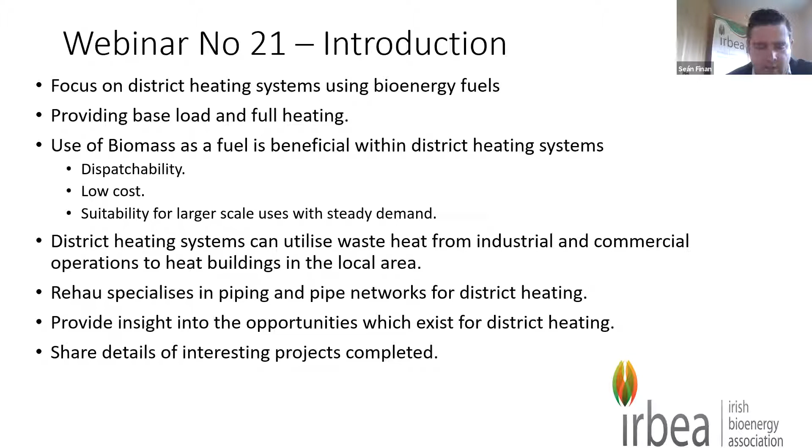REHAU specialises in piping and pipe networks for district heating and will provide an insight into the opportunities which exist for district heating. Details of some interesting projects which the organisation has been involved in will also be outlined.

Our speakers this morning, and we're delighted to be joined by Rory and Alexandra. Rory is the REHAU area sales manager based in Ireland, and Alexandra is the REHAU technical team lead for district heating based in the UK.

So I will now stop sharing my screen, and I would invite, I think it's Rory first, to share your presentation. We'll look forward to hearing your presentation, Rory. Thank you. Okay, good morning. Sound okay, Sean? Perfect, yeah. Okay, lovely, thank you very much.

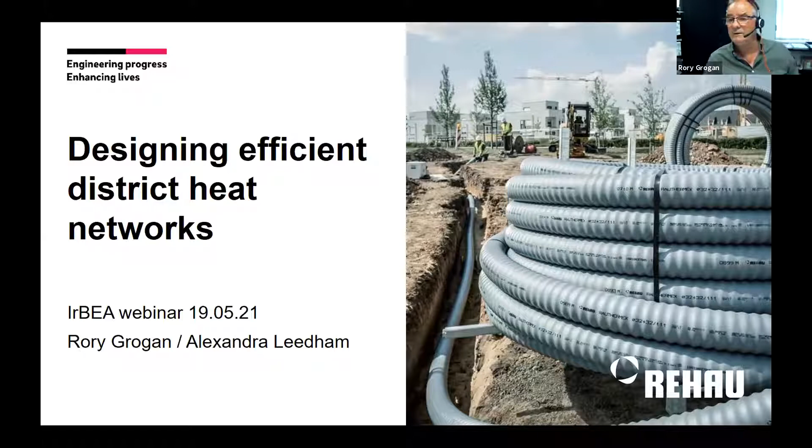Thanks, Sean, and thanks to IrBEA for letting us present this morning. My name is Rory Grogan, I'm an area sales manager for REHAU. REHAU itself is a German company founded back in 1948 in a town of the same name. Currently, we operate as an international company in about 50 countries, 170 locations, covering manufacturing, distribution and sales.

We operate in various markets, be it the automotive industry, the window industry, industrial division. We have a dedicated business solutions division, of which I'm part. My responsibilities would be for the sales of, among other things, district heating pipework, underfloor heating, plumbing and heating, acoustic, soil and waste, to name but a few.

Regarding our district heating product, we consider ourselves probably one of the market leaders in the UK market. We're also the largest stockist of district heating pipework in the UK, so we're very close to our customer base and we can react with quicker response times. We also manufacture some of the pipework in our own facility in North Wales, again to be near to the market and to reduce our CO2 impact on the market.

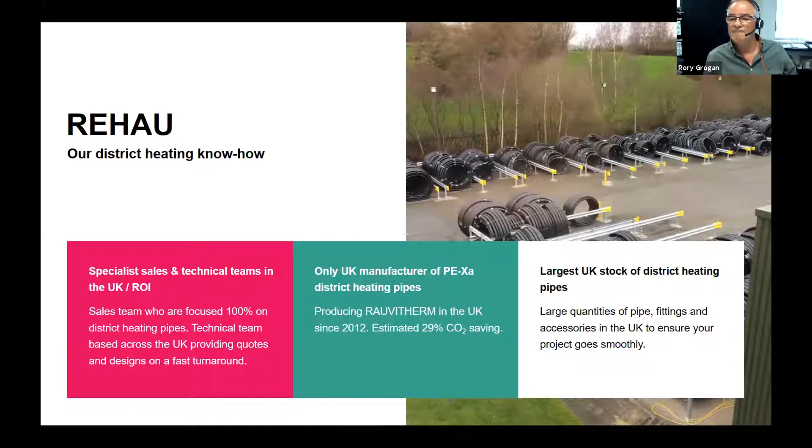So what we're going to do now is look at the agenda for today: basic principles of district heating, some standards, the different types of material that are available, some topics about installation and design, and then finally some case studies with questions and answers.

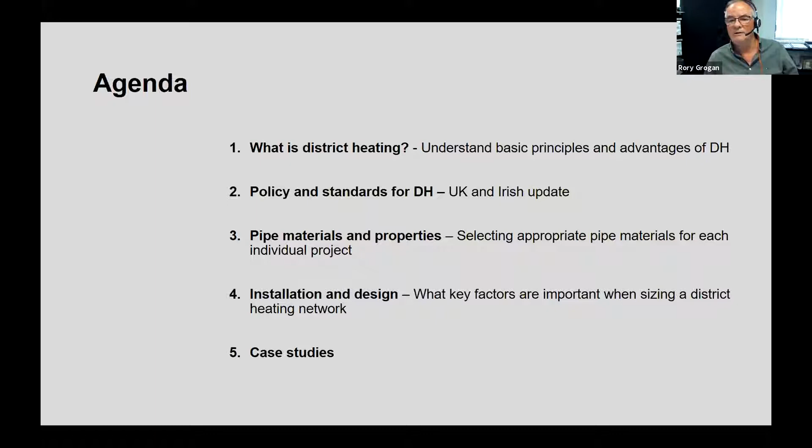So if you're in this seminar, you probably have either heard of district heating or are experienced in it, or wanting to learn a bit more. So just an overview of what district heating is if you are new to it.

The basic principle is that there is a heat source, which is a central source for an area. You don't have boilers in the individual buildings. This heat is distributed around via a network of pipework, delivering heat to either domestic or non-domestic buildings, such as schools, hospitals, etc., or multi-occupancy buildings, where the heat is then distributed to different floors and flats accordingly.

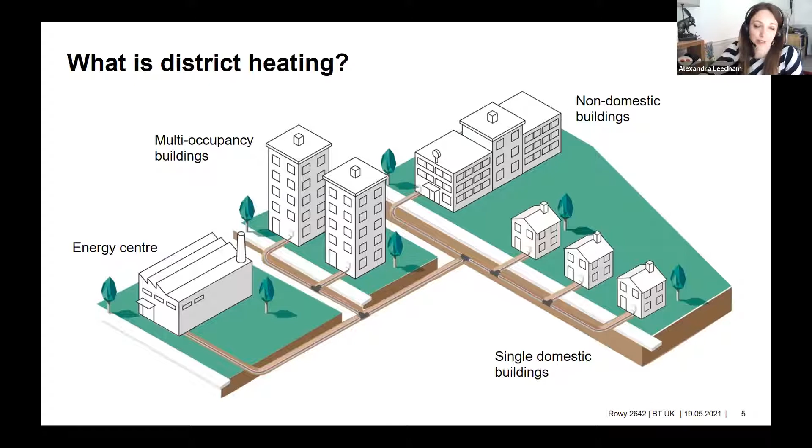Inside of the building, the pipework is connected to a heat interface unit, then the heating is distributed with internal pipework through underfloor heating or radiator systems, so any conventional heating systems.

Energy efficiency is the biggest driver of district heating, and it's more efficient to produce energy on a local level. The driver for district heating in the UK and in Ireland is the combination of renewable energy sources such as biomass and heat pumps.

There is always a benefit of not just going renewables, but also that there is economies of scale. So all these technologies are feasible on a scale where a few buildings are connected. In general, district heating or a heat network would be systems that connect more than 2 or 3 buildings altogether.

This technology is future-proof, so the heat source can be changed at a later stage. So if you would like to combine heat sources as well, this is possible. Having a backup boiler of some sort, or changing the technology completely over the next years, that is also possible.

There is no maintenance for every single building as you would have with boilers, and this is one of the biggest benefits too. So there is a central plant maintained and looked after by the operator.

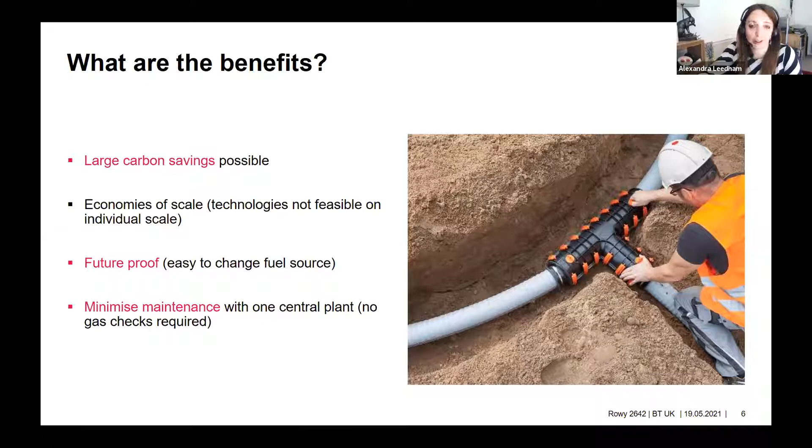The heat sources range from gas CHPs, which are going to probably reduce in the next years, heat pumps that have been talked about quite a lot recently, biomass and anaerobic digestion, something that we'll be talking about today, which is really good for rural areas where there is no supply of other heat means.

Solar thermal is also a technology which can be combined with others, for example even with anaerobic digestion plants, biomass, CHPs, etc. There can be deep geothermal heat sources for heat pumps, or waste heat, and waste heat can cover a range of different scenarios. It can be production factory waste heat, data centers, or even sometimes sewage heat or infrastructure waste heat—a lot of different options.

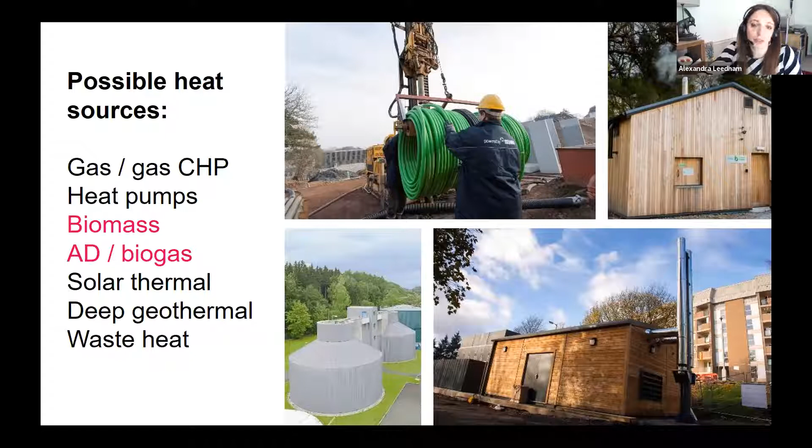The question is, why don't we install more district heating, and why it hasn't been as popular in the last 20 or 30 years? There is a mixed history.

In the 1960s and 1970s, district heating was encouraged and installed quite a lot, but it inherited a bad reputation because it wasn't a very efficient system, with lots of steam networks which did fail and were really designed to sell more coal, not for their efficiency or for good design and energy savings.

Later on, these kinds of systems were replaced by boilers, and now we're coming back to district heating because, with economies of scale, it is a very efficient way of heating our cities, towns, and villages. Unfortunately, district heating has a higher capital investment cost, but that comes with savings in the long run.

Education is one of the biggest things on our mind at the moment, because low awareness among consumers creates a block between installing a connection to a district heating system versus a boiler, where you have control over what you're doing and where you want the heating placed. The next webinar of the association, I've noticed, is on community involvement, and this is probably a very good link to this awareness about the benefits of district heating systems and how customers can benefit from it in the long run. It's one of the most important points here.

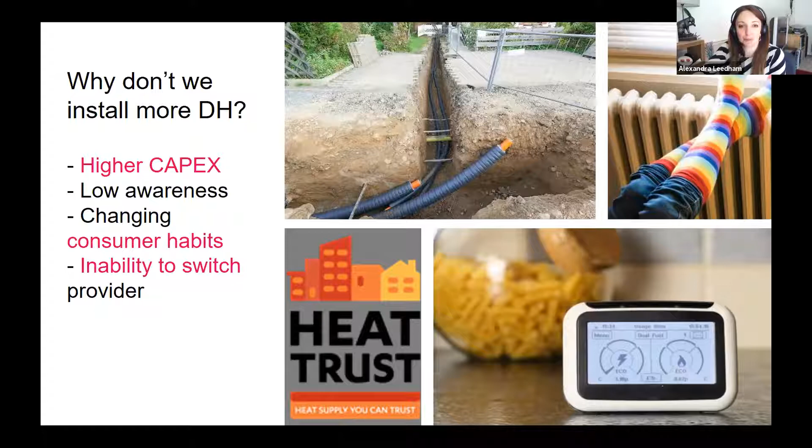Around policy and standards, from a UK perspective, there is experience of having a biomass boom, shall I say, installed in various projects with smaller and larger systems supported by RHI. Now we are observing that gas boilers are being banned for new homes from 2025, so a lot of developers are already looking at district heating systems as a new technology to install in a couple of years. Generally, district heat only covers 2% of all heat demand, and this is planned to rise to 17%, with government support.

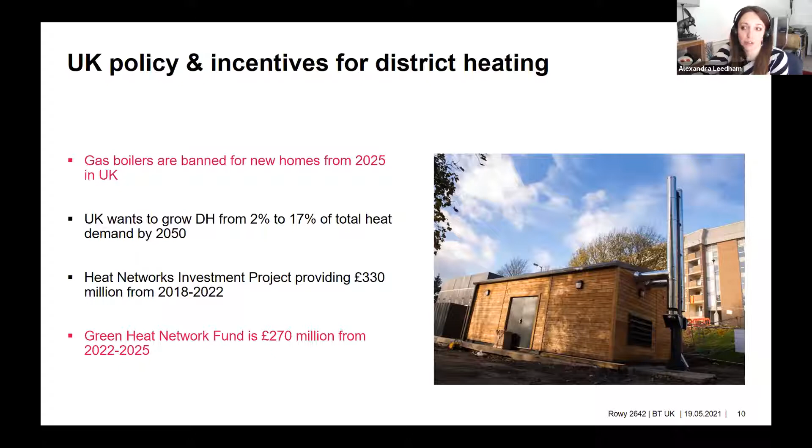So incentives are the second point after education, which is extremely important to promote these systems. This is something the Heat Networks Investment Project has been working on, and a new scheme is being launched, the Green Heat Network Fund, from 2022 onwards. Incentives are really helping this industry evolve and progress, and hopefully there will be new schemes launched in Ireland and Northern Ireland too.

The association probably knows a lot more about renewable heat policy in Ireland, so I would encourage you to get in touch with my colleagues here. But from what you've probably heard and seen before, Irish policy is to supply 40% of renewable heat by 2030, which is a good ambition. This means district heating targets of 10% by 2030 should increase by 1% yearly. Again, this is a good ambition, and I think it's achievable. If you look at the rural percentage of heat demand, this is where biomass, anaerobic digestion, and waste heat can probably be incorporated, and that's a huge opportunity for Ireland.

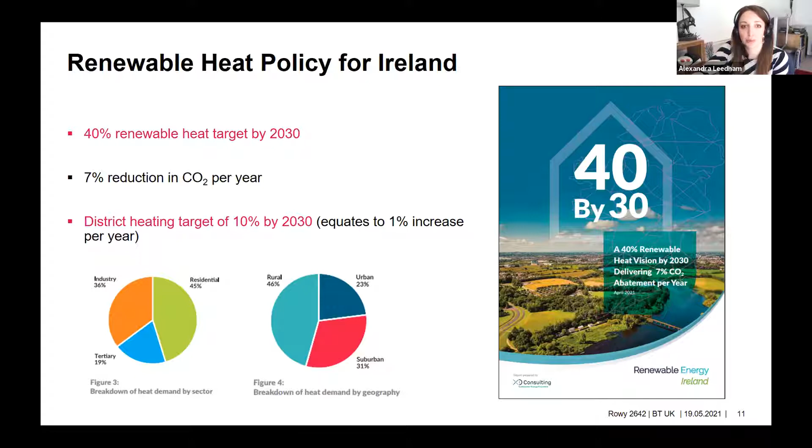If you are new to district heating, or would like to deepen your knowledge in a specific area, I would strongly recommend looking through the CIBSE Code of Practice for Heat Networks. This guide covers literally everything from the very start, feasibility study, assessing your project, putting your team together, all the way to commissioning, customer support, post-commissioning and operation of a network. It covers different points on designing the system, what material options you have, where there's a minimum requirement, and where best practice is recommended. So you have a choice of levels of how you comply with this guide. In the UK, this guide is obligatory for all incentivized systems. If you receive funding from the government, the system has to be covered by the minimum requirements of the code. So it's a really good guide, and I'd recommend looking through it.

As you know, Rehau are a manufacturer of polymer systems, but I'll give you an overview of the pipe material options available. We're mainly looking at steel and polymer. When you look at the full range of pipework, they're divided into those insulated with polyurethane foam, which is rigid foam - these are the three pipes on your left - and the other type, layered foam around the pipework, which are non-bonded systems where the insulation isn't bonded to the actual carrier pipe. Each of these pipes has strengths and weaknesses, but we'll go through them now.

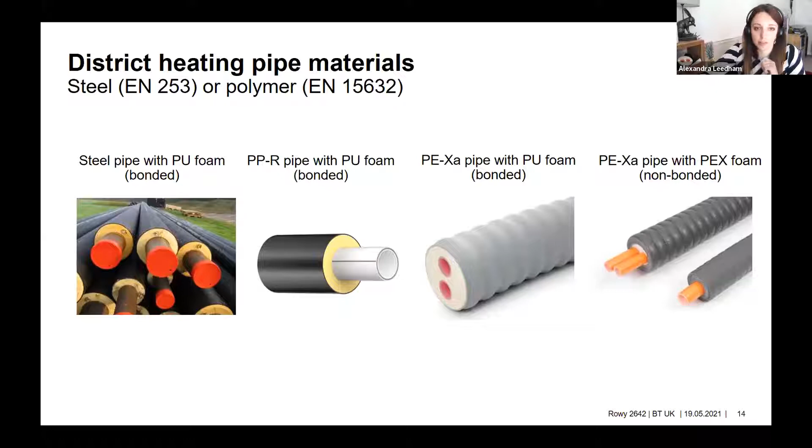When we look at steel pipes, they're very strong in their temperature and pressure limits. This is why they've been so popular for steam networks with really high temperatures, like 90, 100 and plus degrees, and also for citywide networks where large diameters are important. These networks stretch for kilometers across cities, sometimes as ring networks. That's where steel is at its strongest, because pressure limits are quite high and large diameters are a very good combination for these kinds of systems. It's a very strong material, resistant to impact damage as well. On the weaknesses side, this material is quite heavy and not flexible - it always comes in straight lengths with a welding requirement after each 6 or 12 meter length.

There are some coiled solutions, but only for the smallest pipework at the moment, and they're not the classic steel configuration - they're more like a corrugated type.

When joints are required every 6-12 meters and for every directional change, it adds up the installation cost due to the fact that you're welding every single connection. At the same time, the picture on the right shows an expansion loop. So every system designed in steel will have to have expansion loops at every directional change or when the stretches of pipe are quite long, to accommodate the expansion forces on the system.

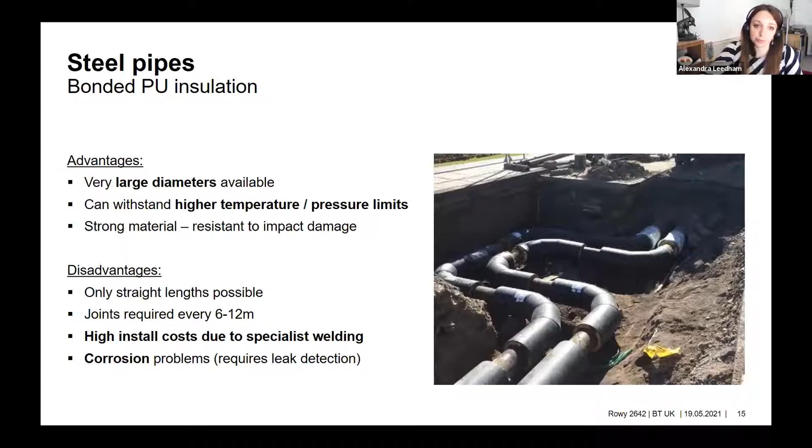PPR pipes are also large pipes, but in polymer. PPR stands for random polypropylene. This has the same insulation as steel, polyurethane, and in general it's available up to 315 mil in diameter, so in steel equivalent, DN 250. But these kinds of pipes can be manufactured in slightly larger diameters too, as a custom option. If you would like a combination of, for example, PPR pipework and another type of polymer like PEX, you can have a hybrid system between these two to create a fully polymer system on a larger level.

At a temperature difference of 30 degrees, so for example 70-40, you would achieve 16 megawatts covering in a 315 mil pipe, so quite a large amount. There are no expansion loops required due to the way the material expands and contracts, so as opposed to steel, this pipe can go in a straight line without any need for loops.

These materials, all polymer materials, are highly corrosion resistant. Simply, there is no steel, no other corrosive metals in the pipe, and because of that there is no requirement for leak detection. So you will see that most of the polymer pipes don't actually have any.

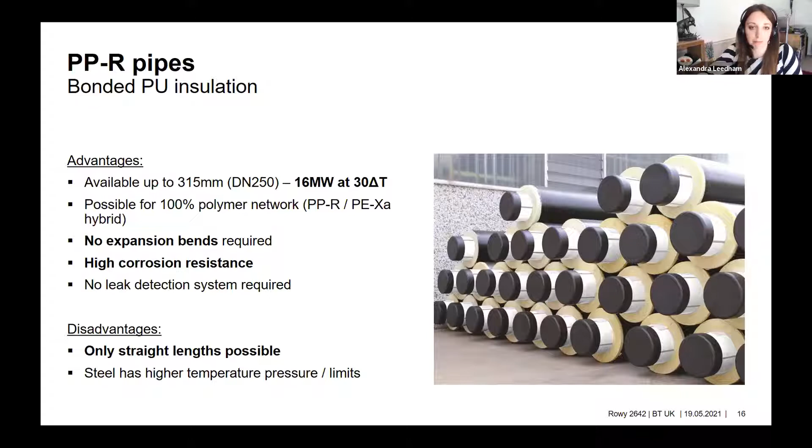We do two different types of PEX pipes. The PEX pipes themselves are the same, but one is with bonded PU insulation and the other is with layered PEX insulation. The advantages of both is very long coil lengths, so you don't have to have any connections in between, compared to 12-meter lengths or 6-meter lengths.

So for long soft dig projects, especially where you're only required to open a short part of a road, for example in a city center, coiled pipework is really time and energy saving. It has really good flexibility and no expansion loops are required. Again, for polymers, these expansion forces are self-compensating as long as you're burying the pipework in the correct manner.

The compression sleeve joints shown in the picture are used for connecting these pipes, and there are no hot works involved, and no leak detection required, same as in PPR.

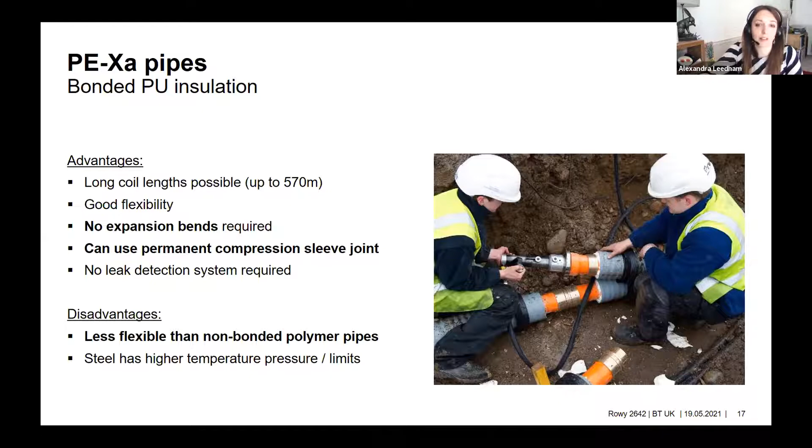When comparing these kinds of pipes with the ones insulated with layered insulation, of course they're not as flexible because it's a rigid PU insulation. And as I mentioned before, steel has higher temperature and pressure limits, which applies to the non-bonded PEX insulated pipe as well.

Here, disadvantages are also that this kind of insulation is of lower performance. So if your project requires as low heat losses as possible and it's a critical situation, then PU insulation would be the preference.

The advantages of these systems is not only long coil lengths, but it's very flexible and it's ideal for house installations. So if you would like to naturally bend the pipe into the house, and the foam is really easy to take off.

The same as on the PU insulated product, this uses a compression sleeve joint, which can be put under pressure and under temperature immediately after it has been installed.

We have some samples to show you later, so hopefully Rory and I can demonstrate how they look like in real life.

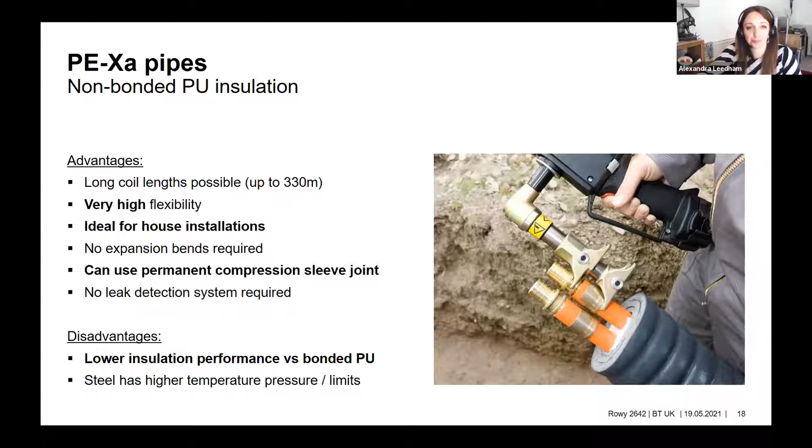The problem with steel, as I mentioned, is not the pipe itself, it's the actual connection joints and the welding of them. According to the German CHP and District Heating and Cooling Association, more than 75% of failures are actually due to on-site welding. That's where, if water is coming out of the system, it will affect the pipe next to the joint as well.

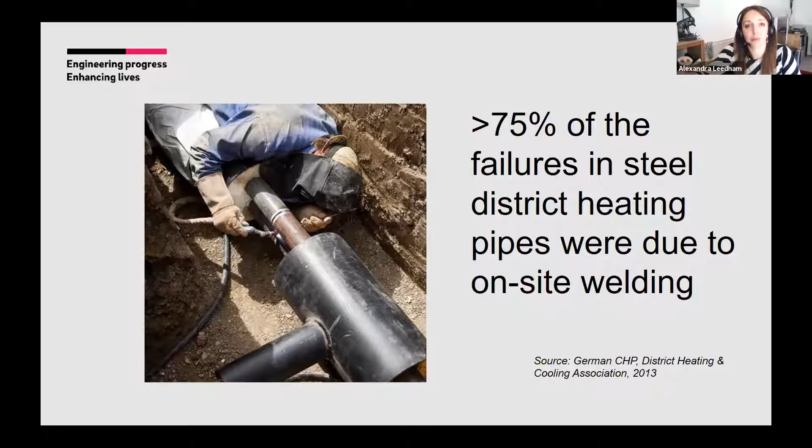A picture sometimes is better than 1,000 words. You can see on the left, the steel system has been installed with an expansion loop and a directional change. Again, these small directional changes for steel always require extra welding and extra pieces of pipe under an angle.

Here we are closing the road off and keeping the pipework occupying the whole area. If a polymer system was used in this case, you would create a T as shown on the right, without sometimes even closing the road, because you only need a small trench to bury the pipe in.

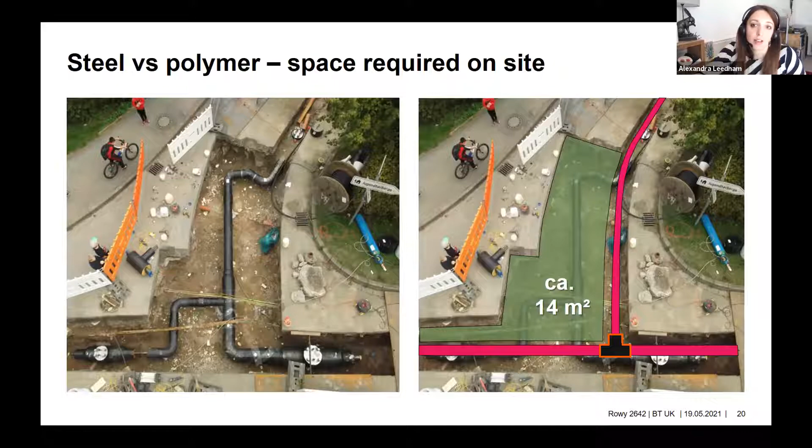When we talk about heat network design, we're always talking about very different generations of pipework distribution systems, with different temperatures. Looking back at coal plant and steam distribution, that's well over 100 degrees. Slowly we've changed to the third generation, which covers biomass and gas CHP, higher temperature waste heat systems, normally around 80 flow, 60 return.

Now we're also moving further to heat pumps and other types of waste heat industries, moving towards 60 degrees flow. These are all different generations of temperatures, while the fifth generation is probably arguably not even a generation, but a very different kind of beast.

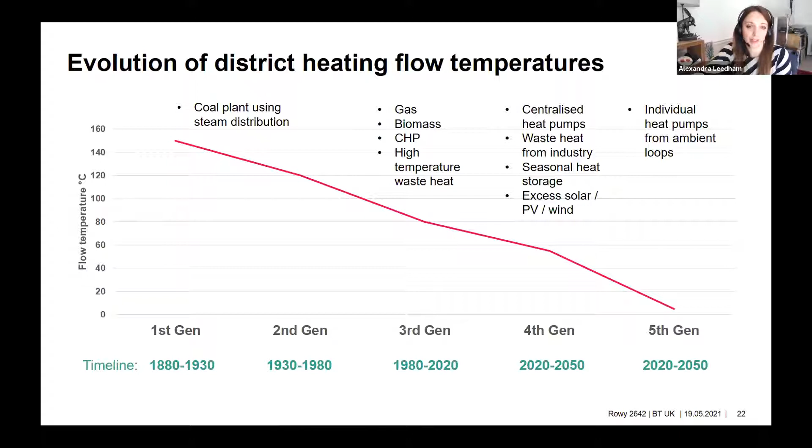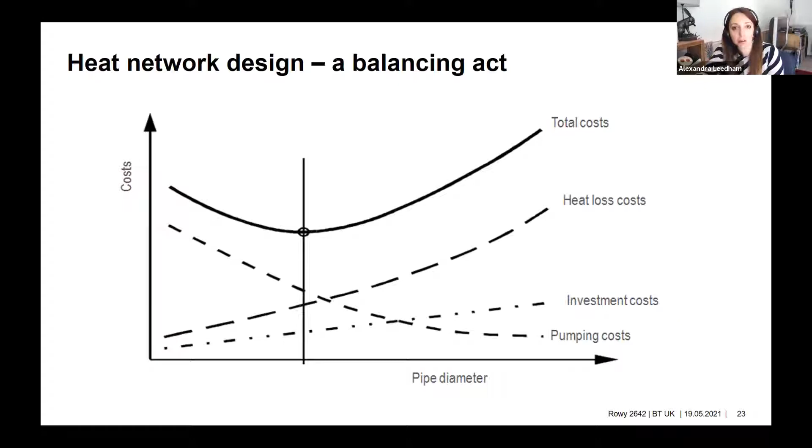Fifth generation is ambient loops, where water is distributed at cooler temperatures and then enhanced by heat pumps at the property connections. But whichever system you choose, there's always a balancing act of combining trying to make the pipe size as small as possible, so the whole network is as lean as possible, while saving on pumping costs and balancing the heat loss of the pipework itself.

There are different methods to reduce installation costs from the very start - capex - such as using soft dig areas so you don't have to go on the roads and reinstate tarmacs. It's also using twin pipes because they occupy less space in the trench, so your civils will be less, but twin pipes are also more efficient in heat loss.

Hot tapping is something where you can avoid using dead legs for future connections, and you can actually tap into a live network at a later stage when a house needs to be connected. And using secondary spines saves cost compared to creating large T's on the main spine.

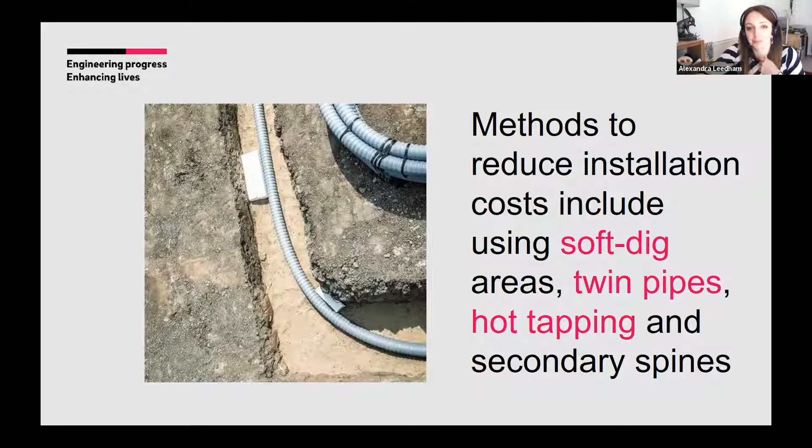I've mentioned the efficiency of twin pipes - here you can see an example of two single pipes in size 25, 40, or 63 compared to the equivalent heat loss in twin pipework. In each case, the saving on heat loss is around 30%.

Which is huge for an operator, not only for the operator, but for the whole system's efficiency. So twin pipes will not only save the civils cost at the very start, part of the capex, but also save costs in the long run as an operational cost.

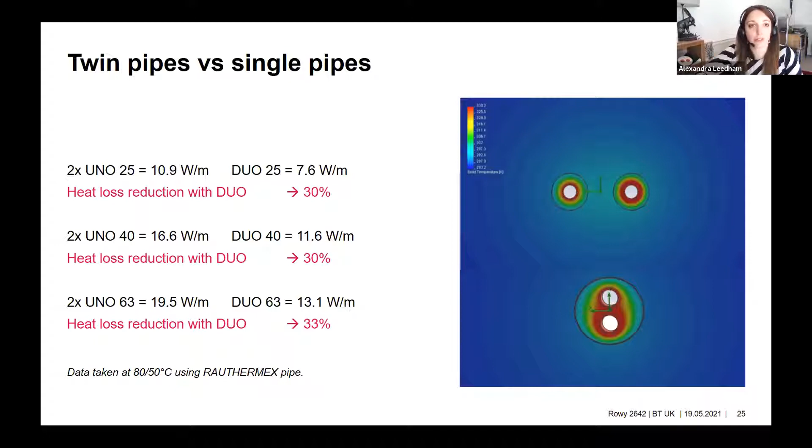Hot tapping, as I mentioned, is literally creating a T, creating a connection to a house that has not been part of the system from the very start, at a later stage. It's a very fast way to create a fitting, and not much soil has to be opened up to create this fitting.

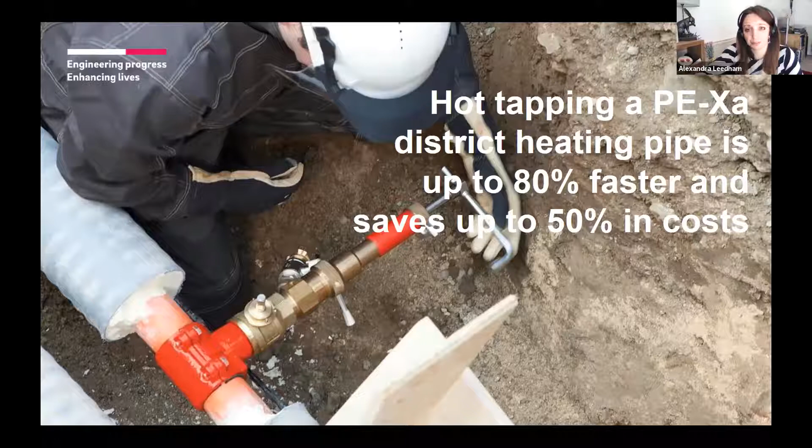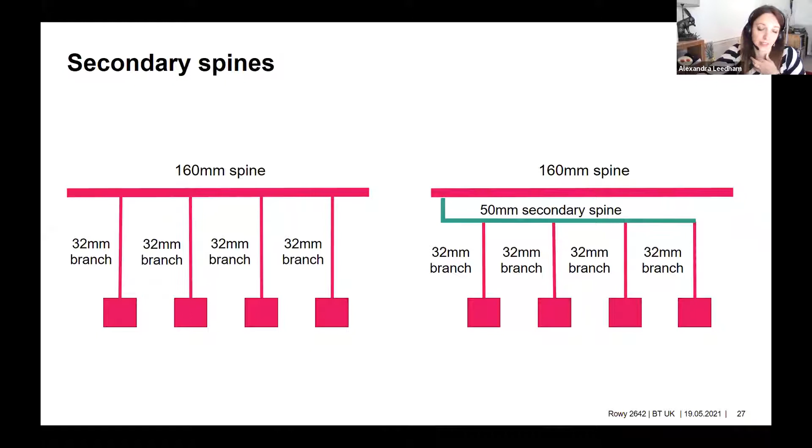Secondary spines are a more efficient way of dealing with connections off a large spine and can save cost in the long run. One of the most important things to look into is the actual requirement for the heat - how much heat is really required, or what is the peak compared to the real use of the system.

It was designed with a diversity of 85%, so 85% of every property would switch on their heating at the same time. But the actual peak load on the coldest day in February was actually only 63% peak. So it's very important to assess how much heat is actually required by all properties at the same time.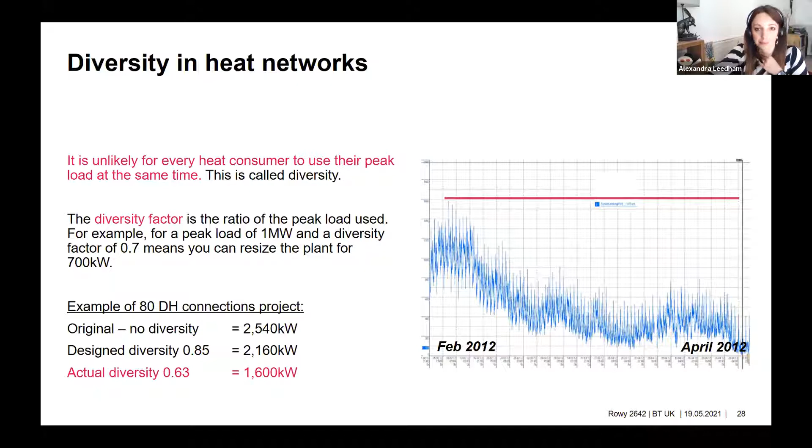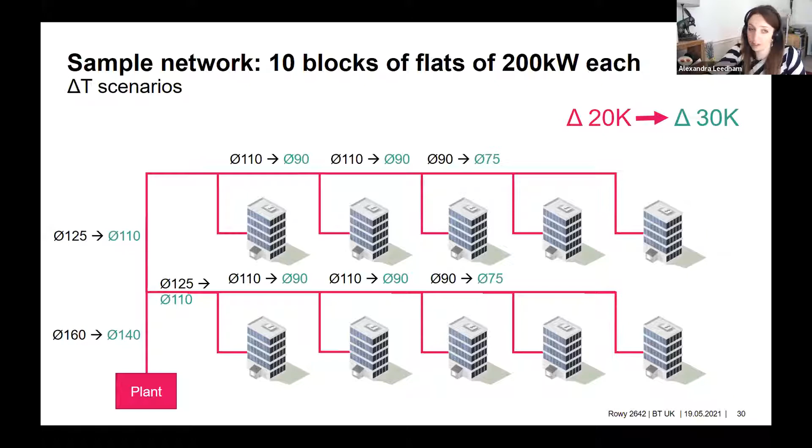Just to show you a small example of how different temperature differences affect the design of the system. If you are designing with a 20-degree delta T, so for example 80-60 compared to 80-50 with a 30-degree delta T, you are saving on the pipe diameter. So the wider the delta T between flow and return, the smaller the pipe work you will get. By increasing the temperature difference, you're not only saving your heat losses, but also reducing the pipe size in the long run and the operational cost.

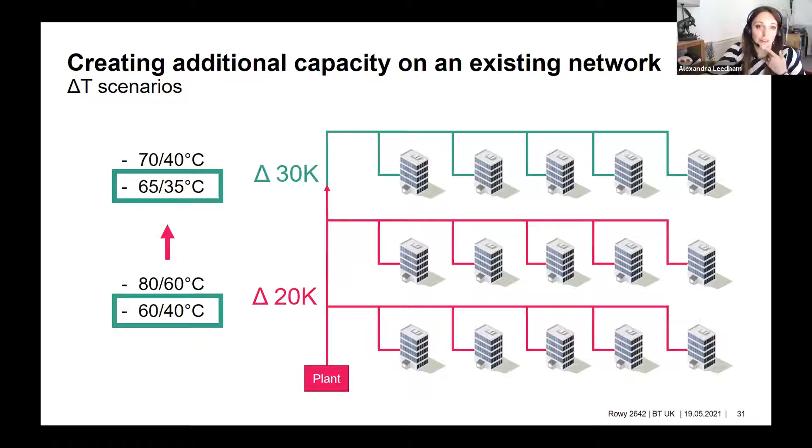If your system has already been designed at a 20-degree delta T, you can always change the temperature slightly to incorporate, to make sure that the same heat network can cover more buildings in the area, and increase it by another 50% in the whole district. Increasing the delta T will also increase the cost saving, because your pipe work will be smaller and the capex will be lower, but also on the heat loss in the long run.

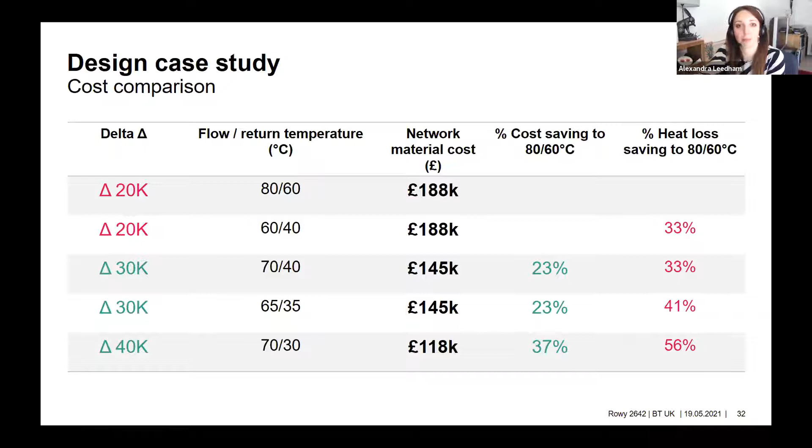As you can see, at 70-40 or 65-35, you are saving on heat loss by 33 or 41% compared to an 80-60 as the original setup. Sometimes dropping the temperature doesn't really change much in the cost saving of the actual installation, because the pipe size for 80-60 will be exactly the same as for 60-40. What you will change here is slightly lower heat losses in the long run. As you can see on the right, the heat loss saving for a 60-40 network would be 33%, but there is no cost saving to the actual pipe work, the actual installation cost.

Among the case studies we have done in the last few years have been a few you might have heard of, like Portmeirion in North Wales. This has been a biomass system with a hotel and 30 cottages. It's actually now being extended even more. It was over 3 kilometers of network. And if you've ever seen the film The Prisoner, this is where it was filmed. Quite an interesting Italian-looking village. Biomass was the key heat source here.

Another project in Scotland, here in the top right corner you will see a small setup. Let me show you here. It's a small biomass setup with a plant and supply of the burning material, with 50 apartments supplied within 1 kilometer of network of pipework. This is just the start of the system, and there are more buildings being built at the moment for the extension of this system.

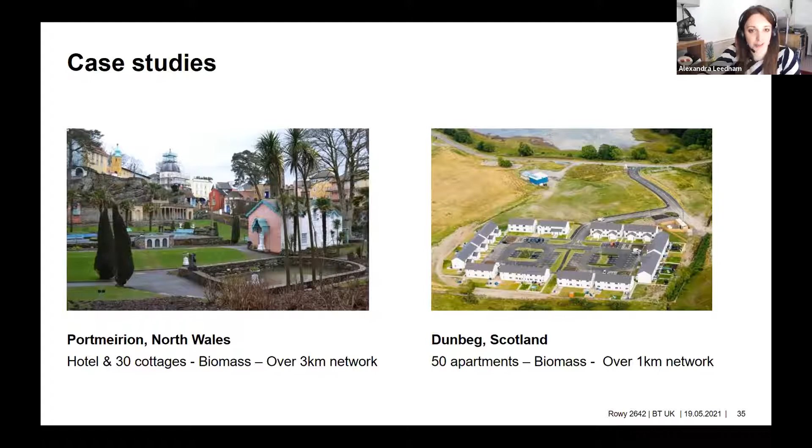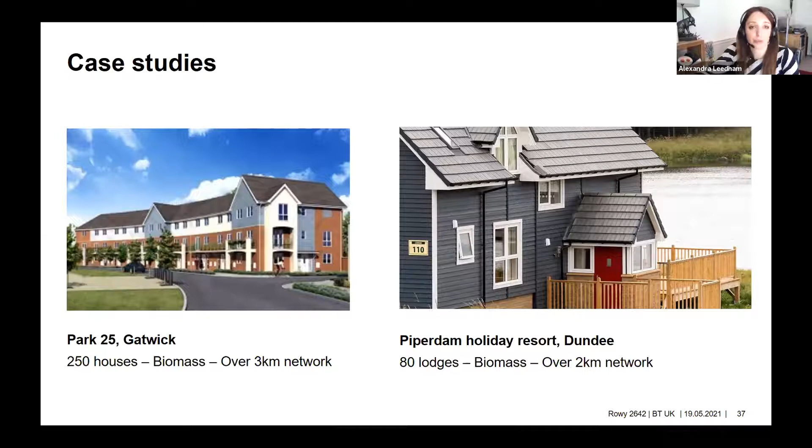The project on the left, Park 25, has 250 buildings, and they are quite dense, close to each other, because this is only a 3-kilometer network, but supplying quite a few buildings. Another project in Dundee, these are holiday lodges, and here you can see it's just over 2 kilometers of network. So projects differ, they can be anaerobic digestion source, can be biomass, but it doesn't really matter how you combine those two or just choose one of them, and it's possible to install various systems to supply heat to the buildings around the plant.

That's all from me. If there are any questions, I would be happy to answer them.